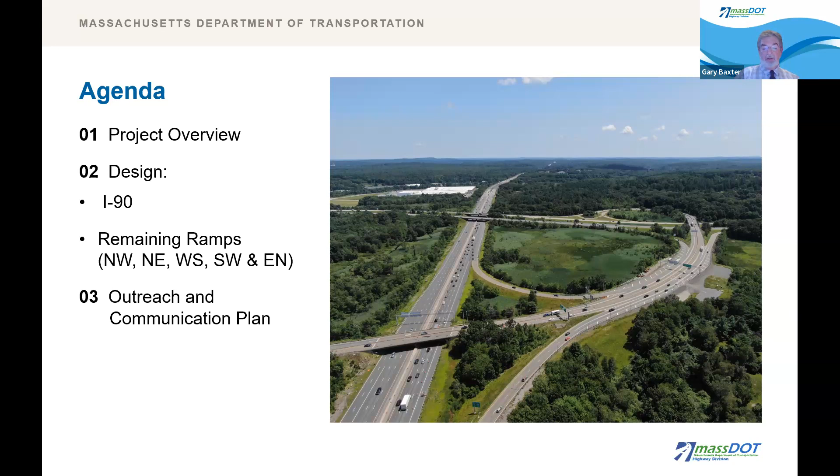All right, tonight's panel includes myself, Gary Baxter from MassDOT, I'm the PM, project manager. We have JP Telemark, assistant construction engineer for District 3. Tom Emmerich, District 3 deputy highway director. Joe Frawley, District 3 operations engineer. Alex Murray from HNTB, our preliminary design team. And our producers, Michael McNutt and Joe Yu.

From the design build team, we have Mark Shamp, project manager for our Barletta Heavy Division. Howard Goldberg from Barletta. Don Cooke, the design manager for VHB. Josh Conradi from VHB, their highway lead. And Keith Sonia from RVA, presenting on outreach.

Before we get into the details further in the presentation, I want to make some high-level points about the project. This is one of the largest projects MassDOT has advertised for construction since its inception in 2009. It's the only interstate to interstate interchange reconstruction ever taken on by MassDOT. On an average day, well over 200,000 vehicles pass by or through this interchange, and 50% of the state's commercial truck traffic passes through the interchange on an average day.

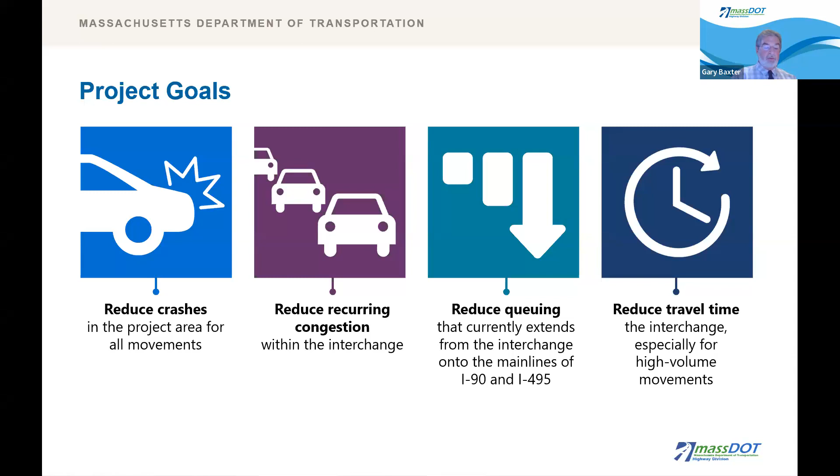The interchange is plagued by chronic congestion, which leads to extensive backups on 495 and 90. Long queuing and congestion lead to long travel times throughout the area and crashes. We have substandard geometry and traffic weaves that lead to crashes and rollovers. Remember that this interchange was originally designed for people to stop in order to pay their tolls. All these issues will be addressed by this project.

And with this, I'm going to turn it over to Don Cooke from VHB.

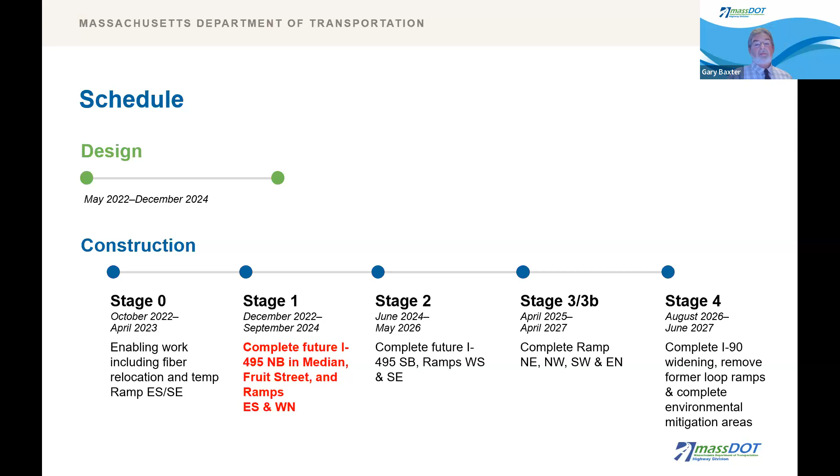Thank you, Gary, and thanks everybody for attending tonight. Part of the problem we have with the virtual format is we probably have many people we've seen at the last 3 or 4 meetings. We might find that out during Q&A, but we appreciate people taking time out of their busy days to attend.

Just as a little background, Gary had mentioned this is a design build project, and there are really 2 primary procurement methods used by MassDOT. One is design bid build, and this is a design build. As a design build project, that involves a preliminary design being developed and permitted by others, as opposed to design bid build, where the design is finalized before going out for advertisement.

As that preliminary design was developed and permitted, our team was selected to advance the preliminary design to final design and then to construct a new interchange. This project will therefore have concurrent design and construction happening over the 5-year total project duration, which runs through 2027. Most of the design is finished by the end of next year, with construction to follow. But as you can tell, we're still talking about design and design development, and some construction has commenced.

So we are continuing to advance the preliminary design to final design, and as you're probably aware, construction has commenced. We have completed stage 0, which included some early enabling work, such as the fiber optic cable relocation from the I-90 median. We are currently in stage 1, that includes work in the 495 median, on the Fruit Street Bridge, and early work on ramps ES and WN.

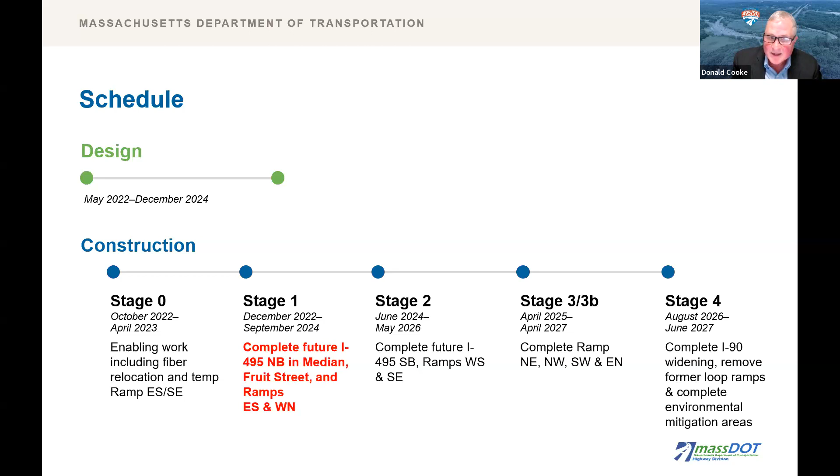So I'll be starting off tonight with a general overview of the project, followed by tonight's focus areas of I-90 and 5 of the new interchange ramps, as Gary had noted. There are a total of 8 new interchange ramps, east, north, south, west, 2 for each direction.

3 new ramps, ES, SE, and WN, were covered at previous public information meetings. For those who have joined us for the previous meetings, we have already covered a lot. We had a general project overview meeting at the end of 2022.

We presented Fruit Street along with ES and SE ramps and their design details in January of this year. We presented I-90 and ramp WN in April of this year. All of the previous meeting materials can be found on the project website.

In general, the project limits extend about 3/4 of a mile in each direction along I-90 and I-495. This project includes a complete replacement of the interchange. It's important to note that the new interchange is to be constructed in an extremely sensitive environmental resource area, which continues to inform our ongoing design development as well as construction activities.

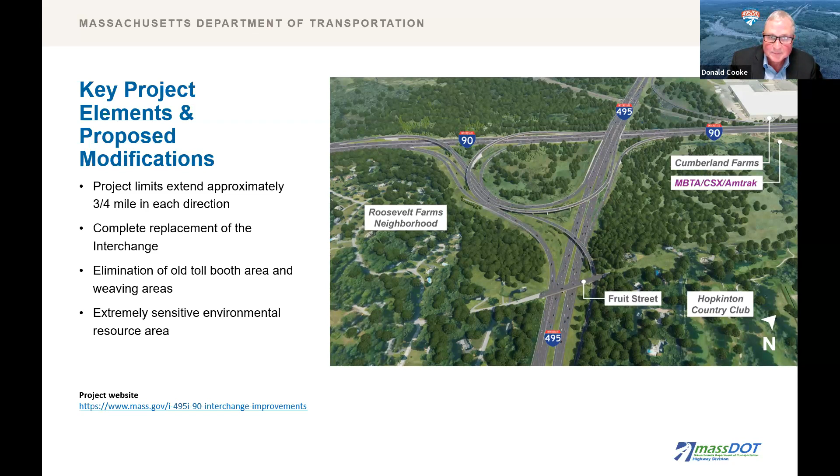I'm not going to spend a lot of time on I-90 right now, because Josh will go over the I-90 design details later in this presentation. But in overview, the future I-90 will provide 3 lanes per direction as it does today. There will be minor horizontal and vertical changes to accommodate the new interchange ramps and bring lane widths and shoulder widths up to current design standards.

The I-90 bridge over the MBTA commuter rail, as well as over Whitehall Brook, will both be replaced. I mentioned the fiber optic cable relocation from the I-90 median, but there will also be additional fiber relocations along the I-90 eastbound shoulder as part of subsequent construction on I-90.

With regards to the I-495 main line, future I-495 will also provide 3 lanes per direction as it does today. However, a major change is that the future 495 northbound will be constructed and placed in the existing median. I-495 southbound will essentially stay where it is. This approach also allows us to stage traffic during construction.

Once the new roadway is constructed in the median, we will temporarily move I-495 southbound traffic to the median, while the future 495 southbound corridor is being rebuilt in its existing footprint. Once that is complete, we will move 495 southbound to its final location and move 495 northbound traffic permanently into the median on the new roadway.

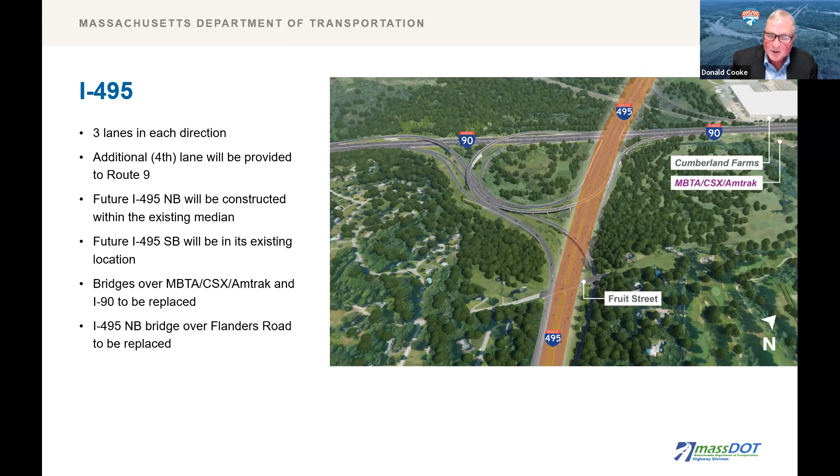So I'd like to walk through the new ramp configurations, and just for context, what ES, EN, WN represent — I'll use ES as the example — it's the ramp that connects I-90 eastbound to 495 southbound, so ES. So ramp SE will connect 495 southbound to I-90 eastbound. I know it's a little bit of an alphabet soup, and we'll try not to be too confusing tonight, but it does get involved with a lot of different designations.

With regards to ramp ES, we did present the details for that design in January, and that ramp is under construction currently. The new ramp ES will be a direct ramp provided between I-90 eastbound and 495 southbound. It is the closest ramp to the neighborhoods in the southwest quadrant.

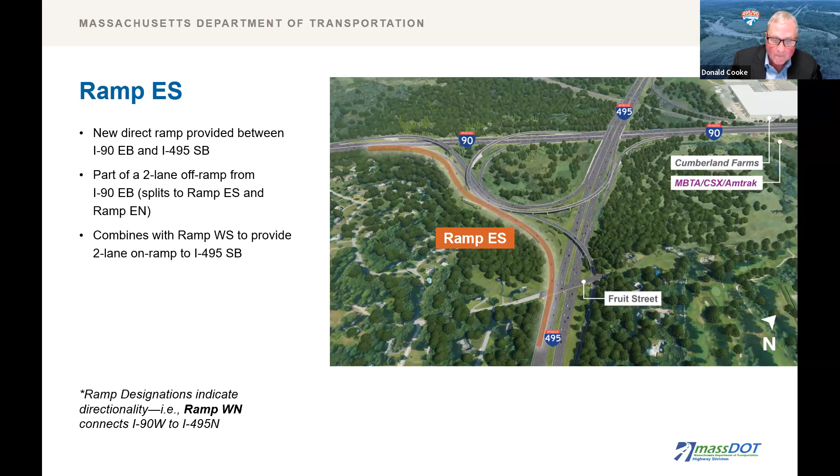Ramp SE design details were also presented in January. Ramp SE is a new loop ramp from 495 southbound to 90 eastbound. It will be part of a 2-lane off-ramp that will then split to provide connections to 90 eastbound and westbound. It will enter I-90 eastbound as a single-lane on-ramp.

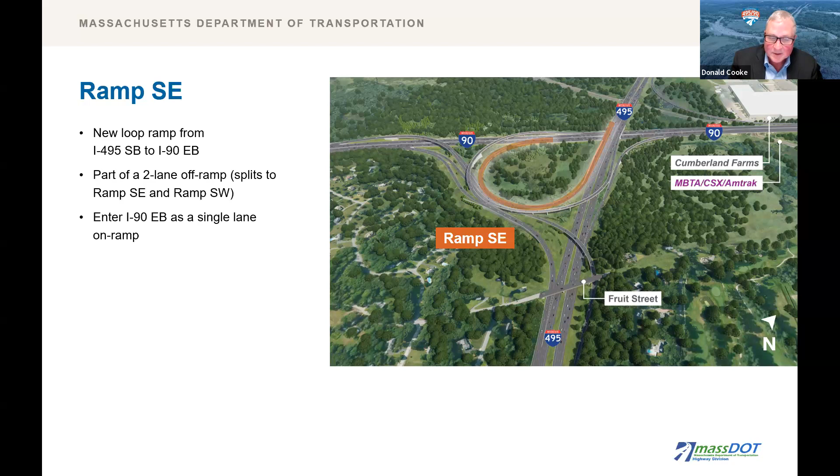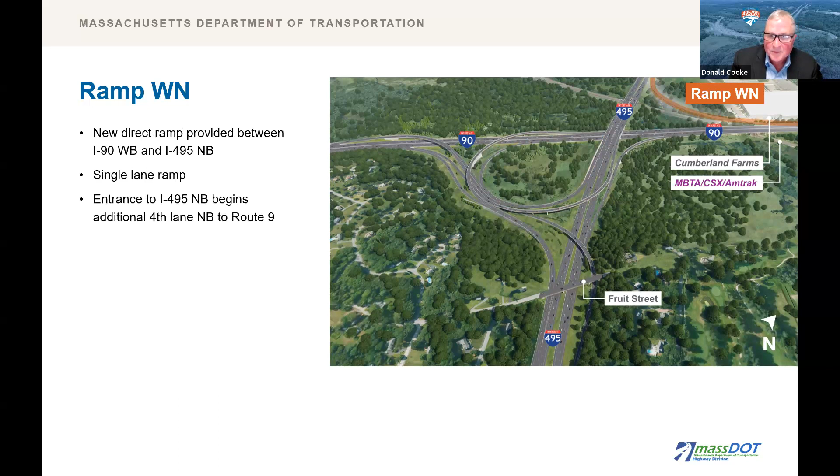Ramp WN is a new direct ramp provided between I-90 westbound and 495 northbound in front of the Cumberland Farms facility. The ramp WN design details were presented in April, but it is a single-lane ramp, and its entrance to 495 northbound begins the additional 4th lane that extends up to the Route 9 495 interchange.

So the details of the remaining 5 future ramps will be discussed in detail by Josh tonight. But just as a quick overview, Ramp WS is a new single-lane semi-direct ramp provided between 90 westbound and 495 southbound. It will combine with the new Ramp ES to provide a 2-lane on-ramp to 495 southbound.

Ramp EN is a new semi-direct ramp provided between 90 eastbound and 495 northbound. It is also part of a 2-lane off-ramp from 90 eastbound that splits to 495 northbound and southbound. EN will enter 495 as a single-lane on-ramp on the new 495 bridge over I-90.

NW is a new semi-direct single-lane ramp provided between 495 northbound and I-90 westbound. Ramp NW will combine with the new ramp SW to provide a 2-lane on-ramp to I-90 westbound. Ramp NE is a single-lane direct ramp from 495 northbound to 90 eastbound, and it enters I-90 eastbound as a single-lane on-ramp.

And last but not least, Ramp SW is a new semi-direct ramp from 495 southbound to I-90 westbound. It is part of a 2-lane off-ramp that then will split and provide connections to 90 eastbound and westbound. And it combines with Ramp NW to provide a 2-lane on-ramp to I-90 westbound.

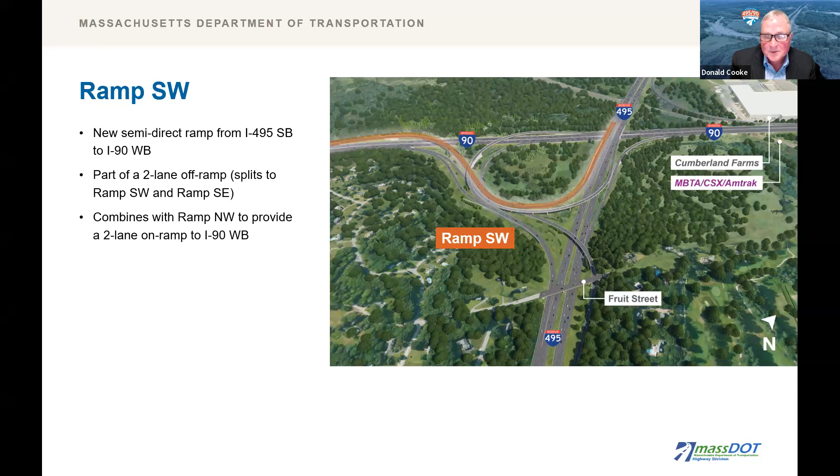In addition to the interchange reconstruction itself, there are two other key elements to the project. We've mentioned Fruit Street before, and discussed it at our January meeting. The Fruit Street Bridge will be replaced in two major stages, maintaining one lane of alternating traffic under signal control. The first major stage is currently under construction, including roadway, approaches, utilities, and landscaping features.

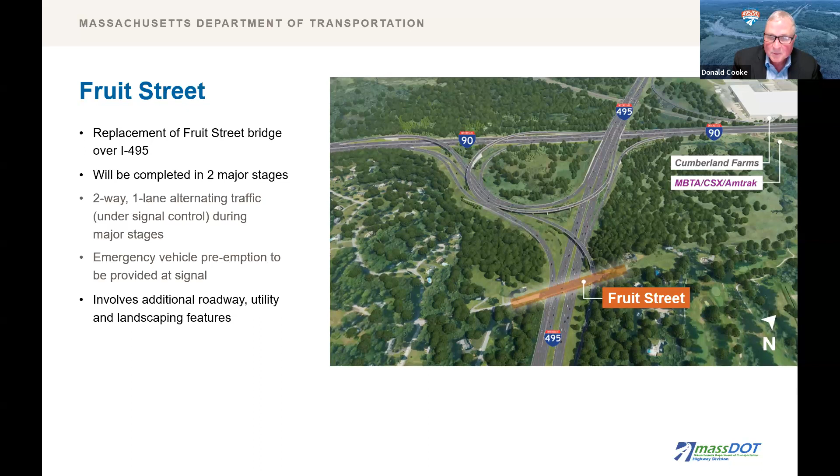Flanders Road, as mentioned, will be replaced. The northbound 495 bridge over Flanders Road will be a superstructure replacement only, constructed with an overbuild so we can maintain 3 lanes of travel during peak hours. There's also utility work below on Flanders Road, as well as minor widening to provide slightly wider shoulders and improve bicycle accommodation.

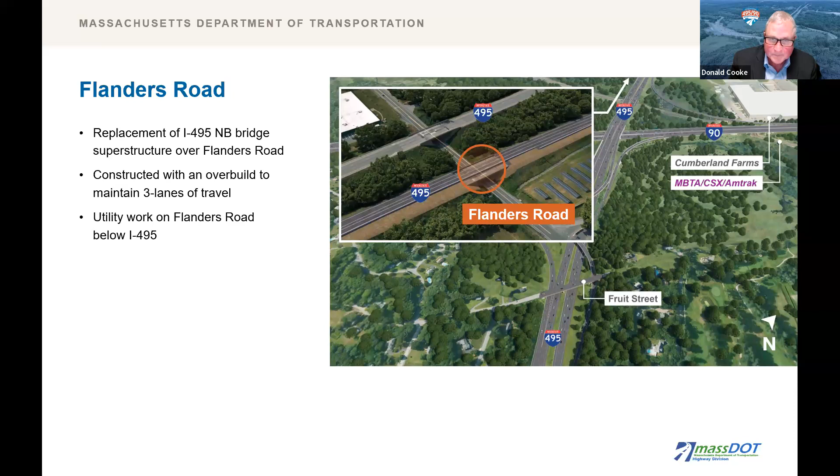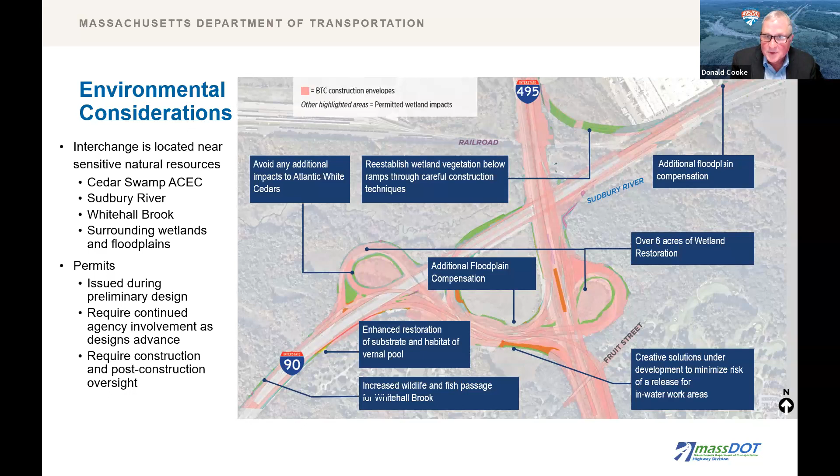I'd like to take a few minutes to talk about items typically of most concern to abutters and the people who use the interchange. This interchange is being reconstructed in an extremely sensitive environmental resource area. Permits were issued during preliminary design but continue to inform all aspects of our final design development and construction activities. These existing resource areas include the Cedar Swamp area of critical environmental concern, the first in the state of Massachusetts, the Sudbury River, Whitehall Brook, as well as numerous surrounding wetlands and floodplains. We are in close coordination with MassDOT Environmental, but also with DEP and the Army Corps of Engineers. This coordination has been ongoing during design advancement and will continue during and post-construction to assure compliance with the permits and that the required mitigation is provided.

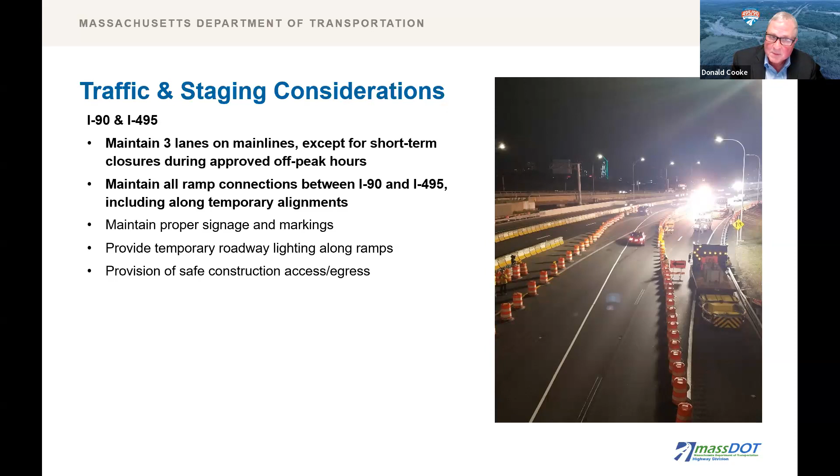Before I turn it over to Josh, one last aspect is traffic. On the main lines, for those who have driven through the project site over the last few months, the existing 3 lanes on the main lines of both I-90 and 495 are being maintained, except for very short-term closures during off-peak hours, primarily overnight. All ramp connections between 495 and I-90 will be maintained, possibly in a temporary alignment, but we are not anticipating any significant or extended ramp closures.

From a local perspective, keeping and maintaining access is important. As mentioned, Fruit Street will be maintained with one lane of alternating two-way traffic. We had a few minor full closures at the beginning of stage one, and will have perhaps a couple more minor closures, very limited in duration, as we transition from stage 1 to 2. But for the vast majority of this reconstruction, the one lane of alternating traffic will be maintained. With regards to Flanders Road, there will be short-term lane closures below to support the bridge and utility work, but Flanders Road is not proposed to be closed at any time.

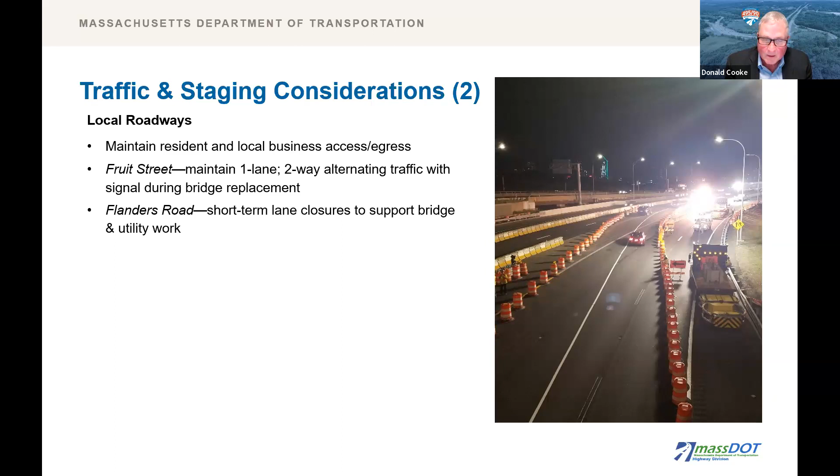With that overview, I'd like to turn it over to Josh from our team to discuss both the proposed I-90 mainline design details and the associated roadway, bridge, traffic, and landscaping details, as well as the remaining 5 ramps. Thanks, Don. As Don mentioned, I'm going to start with discussing the final design of I-90 and then transition to the 5 remaining ramps that have not been discussed at previous meetings.

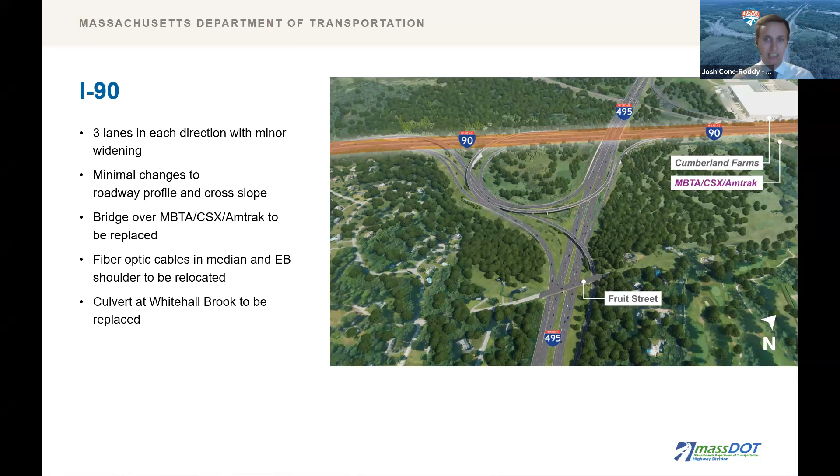This slide is a repeat of what Don discussed earlier, but as a quick reminder, I-90 will basically maintain its current cross-section throughout the project. There will be 3 lanes in each direction with minor widening to provide acceleration lanes, deceleration lanes, and shoulders that all meet current design standards. The design build team will also be replacing the I-90 bridge over the MBTA railroad tracks and upgrading an existing culvert over Whitehall Brook to a bridge.

Here's a typical section of what I-90 will look like at the end of the project. This section runs from the western extent of the project, extending east to about where the existing loop ramps are located off of I-90 today. On the left side, the westbound side, there will be 2 acceleration lanes with a varying width buffer from the mainline traffic as those ramps accelerate on and merge onto I-90 westbound. Next to them are the 3 westbound travel lanes and a paved median that will match the width of the existing median currently on I-90.

I-90 will continue to be separated by a concrete median barrier throughout the extent of the project, and there will be locations where this barrier widens out to incorporate bridge piers or traffic signs, which will reduce the high-speed shoulder temporarily. We'll see an example of that section later in the presentation.

Continuing to move across the screen, you see the 3 travel lanes for I-90 eastbound with 2 deceleration lanes for the eastbound off ramps that head towards 495 northbound and southbound respectively.

Off the roadway on both sides of the pike, there will be a mixture of retaining walls and vegetated side slopes. As Don mentioned, the area surrounding I-90 is a sensitive environmental area, so the walls along this section are mainly to help avoid additional permanent impacts to these sensitive areas.

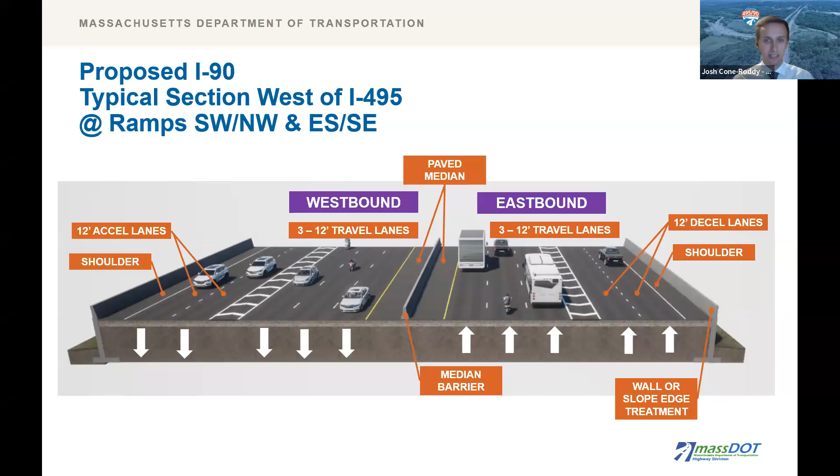I'm going to start with the western limits of proposed I-90 and work my way to the east. The total project length on I-90 is just under 2 miles, so I'm not going to go over every foot of the project limits, but I will be hitting key locations along the way.

The western limits of the project are about a half mile to the west of the existing loop ramps, and the I-90 eastbound and westbound, again, are along their existing alignments as they will be for the entirety of the project.

I'm going to turn on my laser pointer to help you see where I'm talking as I go through these. On the top of the image, you can see the westbound acceleration lane merging onto I-90 westbound.

On the bottom right side of the image here, you can see the eastbound deceleration lanes beginning to form as they head towards 495. Also in this general area is where one of our proposed stormwater basins is going to be installed to help with stormwater management.

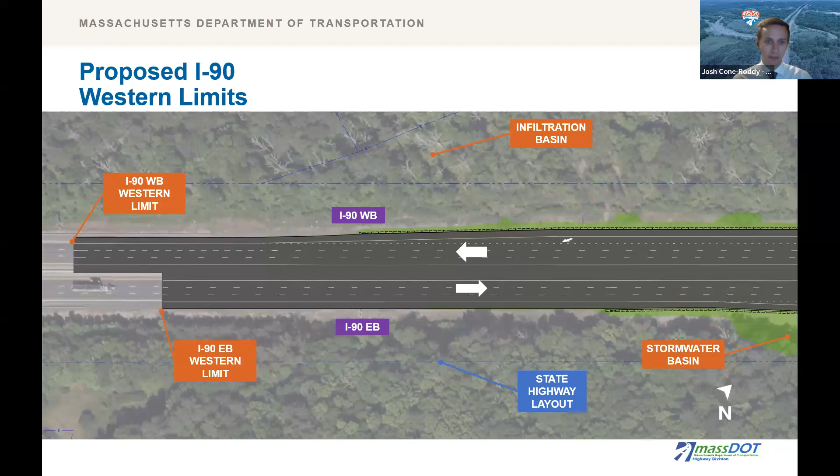Moving to the east, we get to Whitehall Brook, which is about a quarter mile from the western limits of the project. The proposed bridge is outlined in red and is going to replace the existing culvert that is out there today.

On the top right side of the image is where you can see the 2 acceleration lanes from ramp SW and NW, and one of the acceleration lanes actually begins to merge into the second acceleration lane as they continue towards the western limits of the project. On the bottom of the screen, you can see that both the deceleration lanes for ramp ES and ramp EN have fully developed.

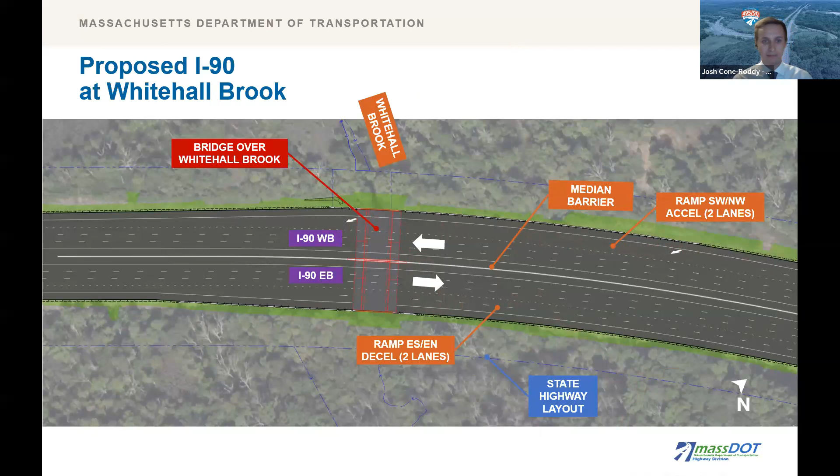Continuing on, we get to where the old loop ramps and the existing loop ramp bridge over I-90 are located. This is approximately 1,500 feet to the west from the I-495 bridges that cross over I-90.

On the right side of the screen is where ramp SW and NW will travel on a bridge over I-90, and they will continue along the top of the image until the acceleration lanes that we saw on previous screens.

You can also see where ramp ES and EN have diverged from I-90 eastbound, and you can see where they begin to split into individual ramps to head towards I-495 southbound and I-495 northbound respectively. We'll go over ramp EN in a little bit more detail later.

At the end of the job, this area at the top of the screen where you can see the existing loop ramps in the aerial image in the background will be where one of our mitigation areas will be installed to help mitigate permanent impacts to the environmental areas throughout the project.

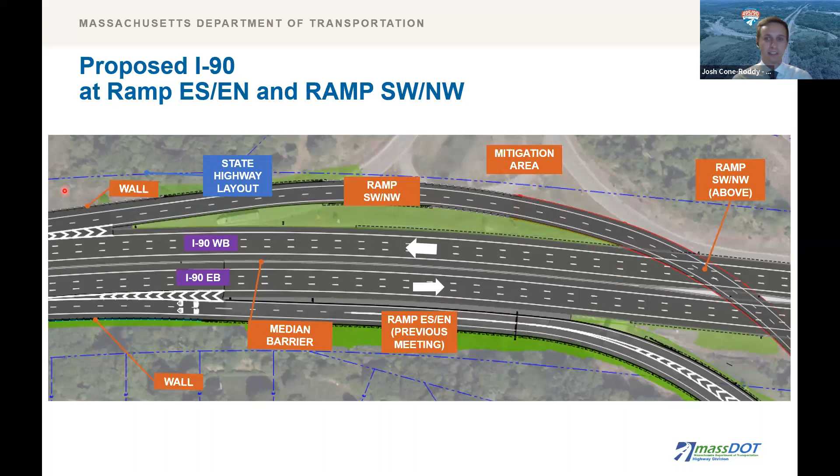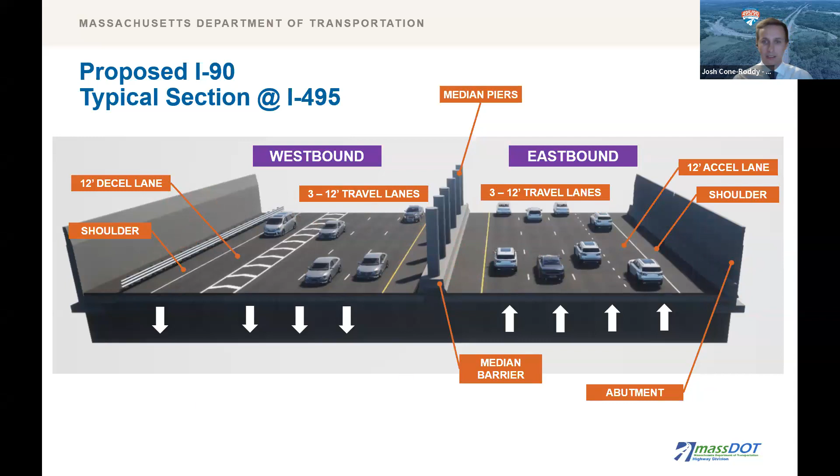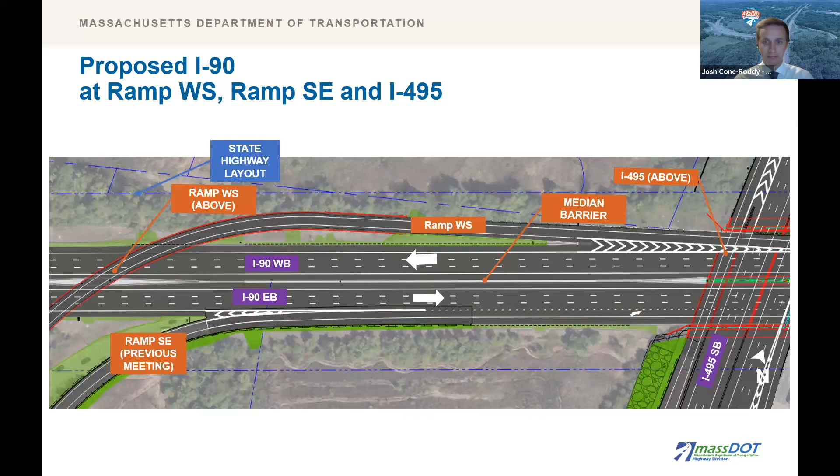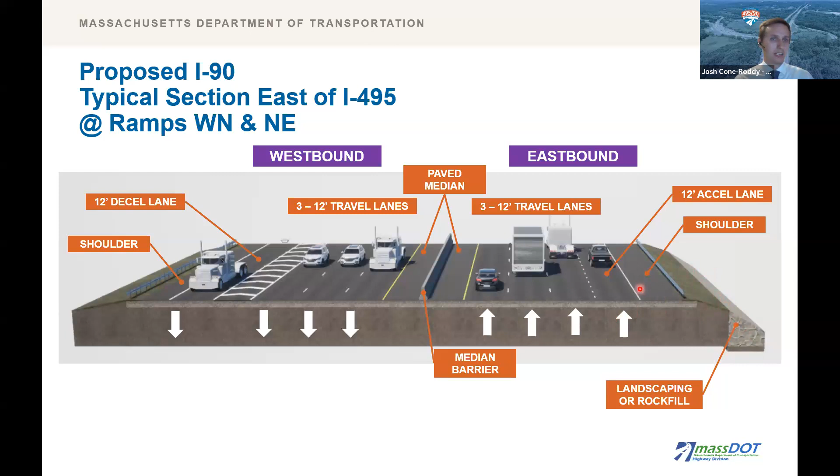The big difference on this section is that we're just showing an example of what those side slopes will look like with a mixture of landscaped side slope and modified rock fill. There will also be some plantings within these side slopes, so it's not going to just be straight grass out there.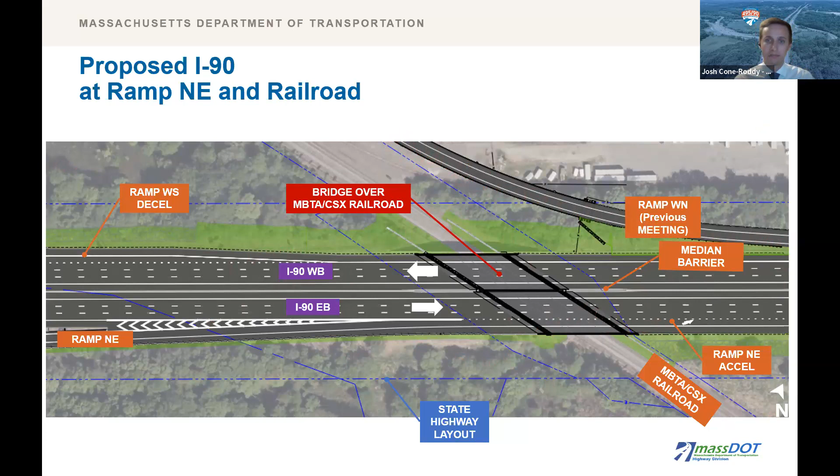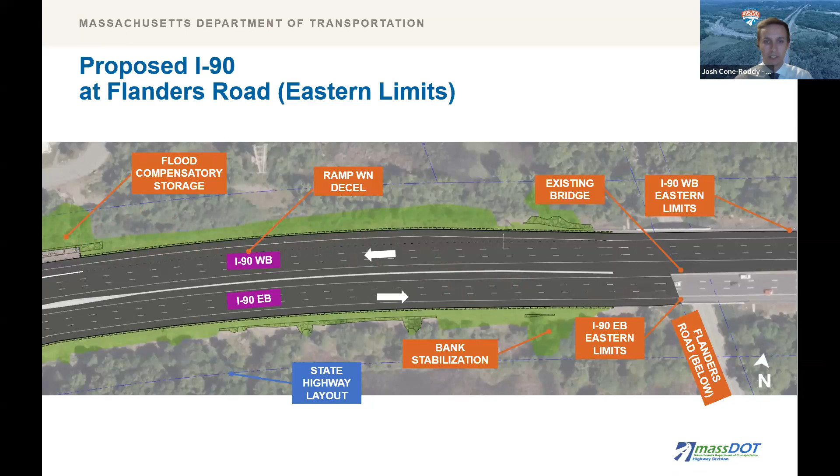Now I will jump into the remaining 5 ramps that have not been previously discussed. As Gary mentioned, those ramps are NW, NE, WS, SW, and EN. I'm going to pause briefly just to take a little sip of water.

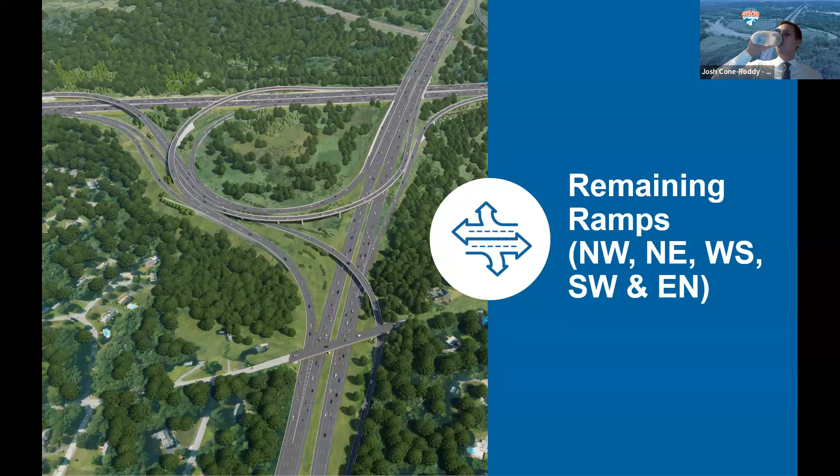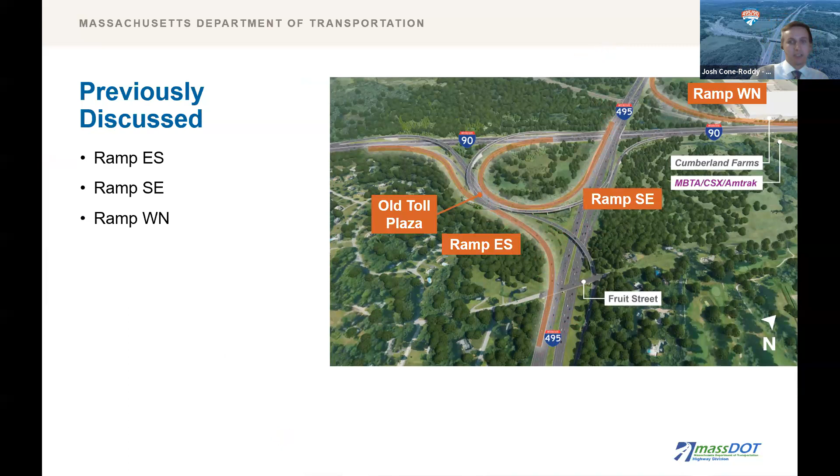Before we jump into each individual ramp, I wanted to start in the old toll plaza area. Today, all 8 movements move through this old toll plaza area with multiple weaving maneuvers and lane changes, which are necessary for vehicles to travel in their desired direction. Our proposed design will continue to see 6 of the 8 ramps travel through this general area, but weaving movements have been eliminated and decision points have been minimized to help operations and safety.

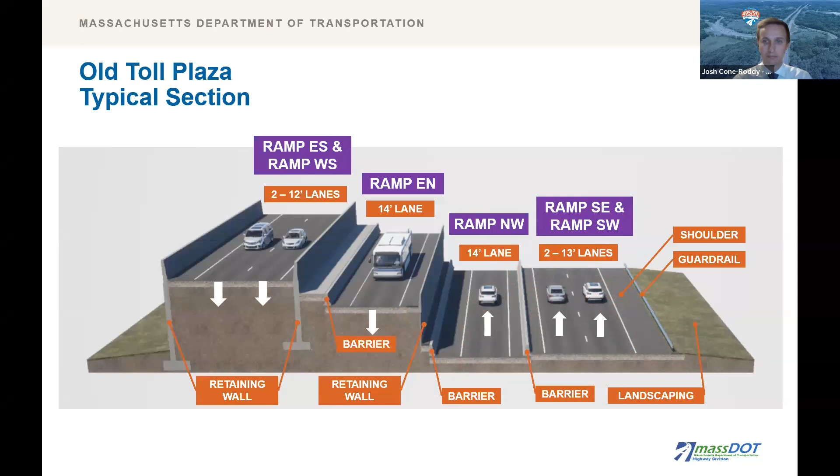Some of these ramps make more sense to walk through two at a time rather than one at a time. For example, ramp NW and SW merge together, so I'll start with those. Ramp SW comes from 495 southbound and heads towards I-90 westbound. Ramp NW comes from 495 northbound, and as we've mentioned, they combine together in a two-lane ramp just past the old toll plaza area and head towards I-90.

To make this as easy as possible, this orange border and dashed line highlight the ramp we're talking about on each slide. As I've been doing throughout the presentation, I'll use my laser pointer to highlight what I'm discussing, since there's a lot of information on some of these slides.

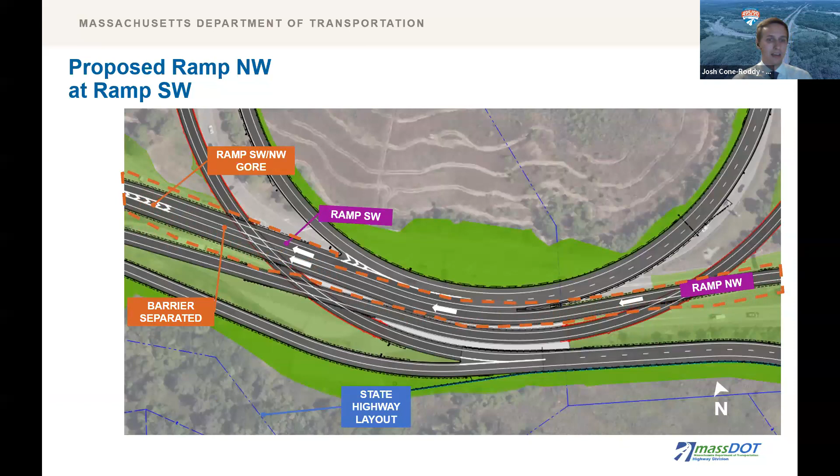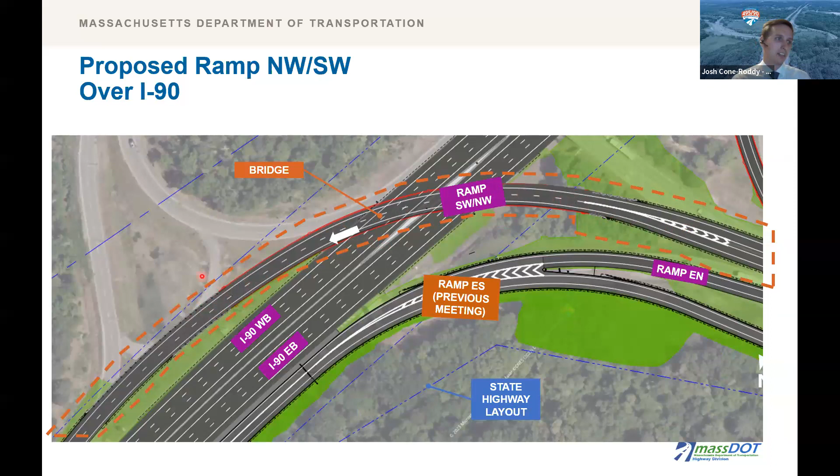Both those ramps continue under ramp WS, which is above them on a bridge structure. They continue to head toward where you can see the Gore area developing — that's where they combine to become a two-lane ramp up on a bridge, heading over I-90 westbound and eastbound, then starting to come back down in grade alongside I-90 westbound in the vicinity of the old loop ramps as they begin to accelerate and merge onto I-90 westbound.

The two-lane ramps continue — you can see where the Gore develops, and then the acceleration lanes we discussed as I went over I-90.

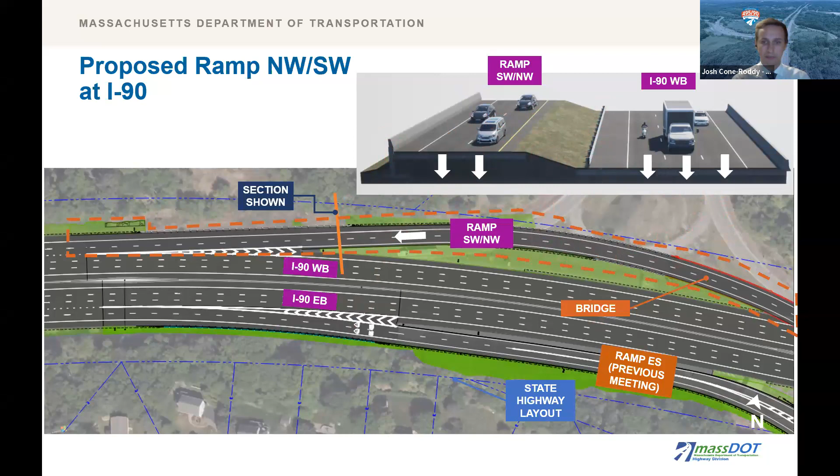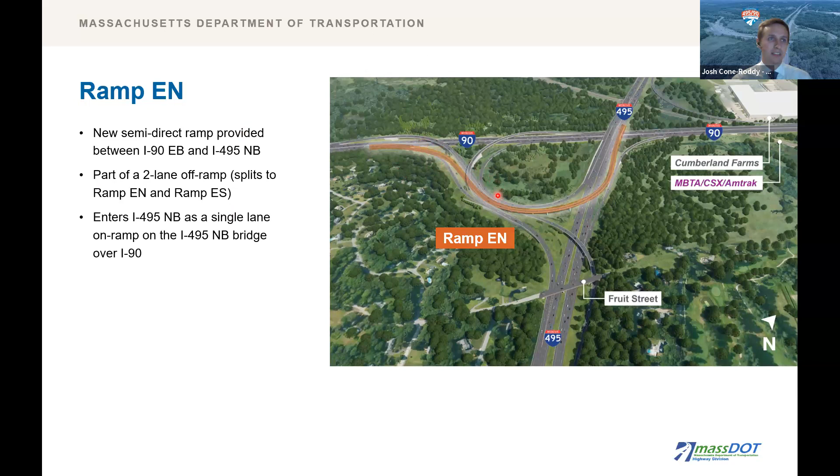The next two ramps I'll discuss are ramp EN, from where it splits with ramp ES to where it merges onto 495 northbound, and ramp NE, from where it leaves 495 northbound to where it begins accelerating to merge onto I-90 eastbound.

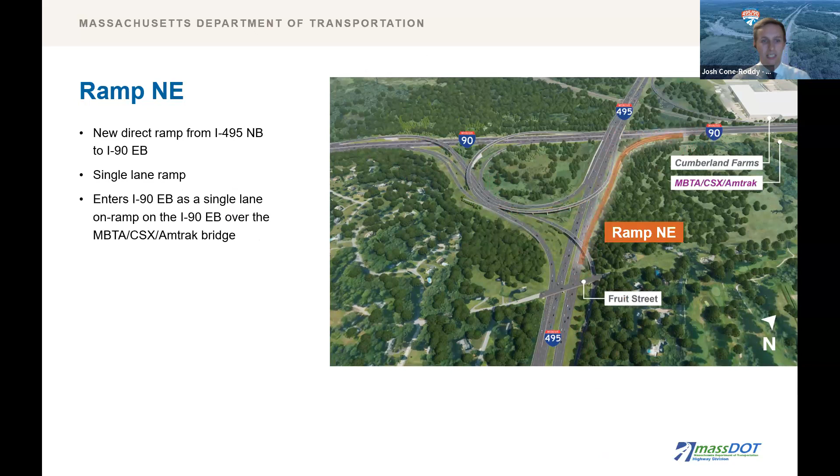Ramp EN and ramp ES, as we saw earlier in the presentation, leave I-90 eastbound together as a 2-lane off-ramp, with ramp EN traffic in the left lane and ramp ES traffic in the right lane. Ramp EN splits off to go towards the old toll plaza area, and ramp ES continues on the south side of the old toll plaza area as it heads towards 495 southbound.

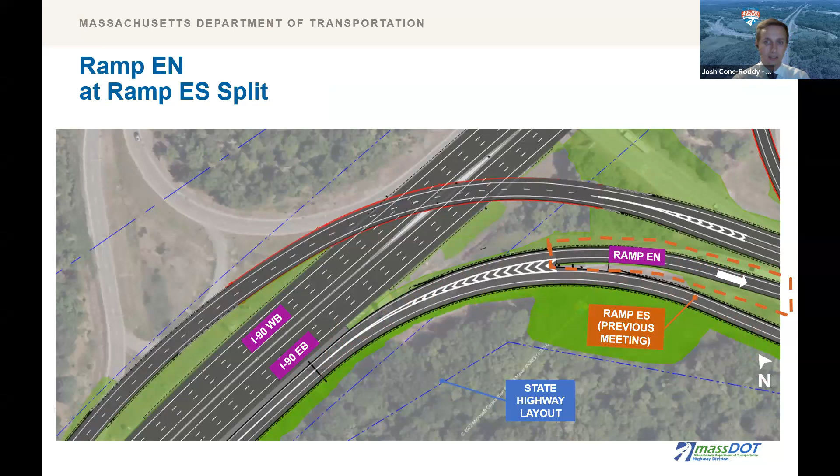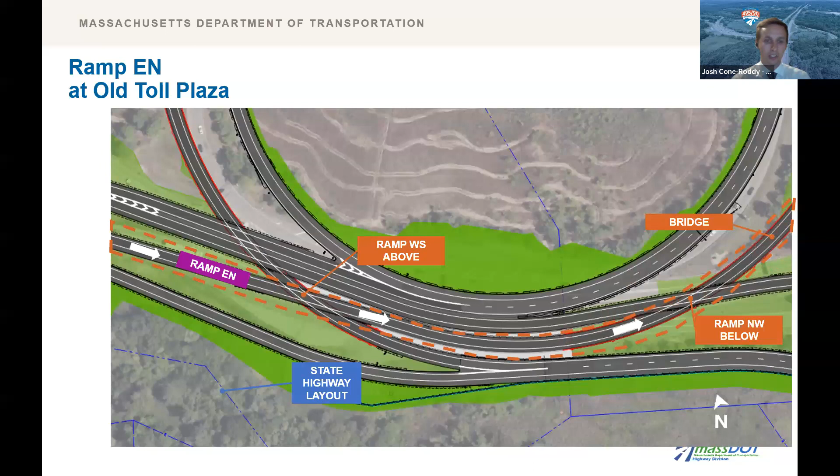As ramp EN heads into the old toll plaza, it will go under ramp WS. Once it gets under that ramp, it will start climbing in grade and elevation until it eventually ends up on a bridge structure, which begins about here. Then it will go over ramp NW through the old infield area, and then continue on to cross over 495 northbound and southbound. Just to reorient you for a minute, we changed the screen there, but this is where the last image left off and where we continue now.

Ramp EN continues over 495 southbound and 495 northbound, and then travels right alongside ramp NE, and then will continue and accelerate onto 495 northbound on the same bridge that carries 495 northbound over the pike.

On this slide, I'll also start talking about ramp NE. Ramp NE diverges from 495 northbound and starts heading almost exactly where the old off ramp is along 495 northbound, and then continues on to I-90 eastbound. Where it gets right up against ramp EN here, you can kind of see what this section will look like. Ramp EN is still going to be quite a bit higher than ramp NE here.

There will be a retaining wall on both sides of ramp EN, with some concrete barrier to protect that retaining wall from the ramp NE traffic. Then this is where ramp NE will be as it's heading towards I-90 eastbound.

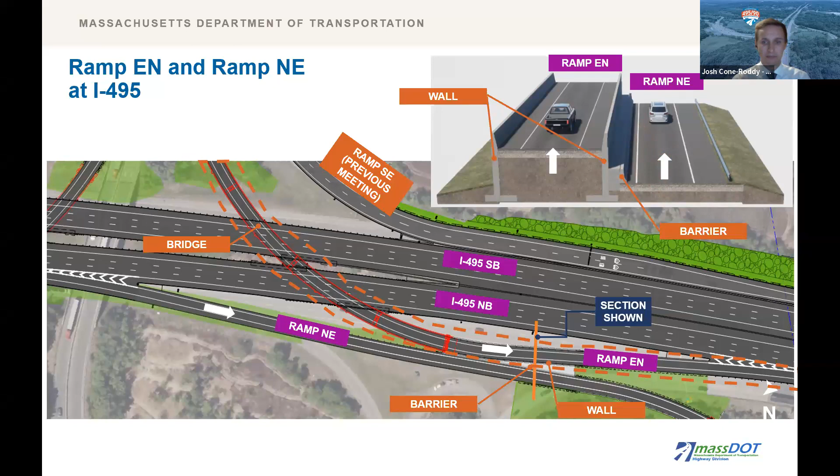As ramp NE continues to head towards I-90, it actually ends up on a bridge structure of its own as it travels over an intermittent stream and near some DCR parkland, and eventually ends up traveling over a culvert that carries the Sudbury River underneath I-90.

There are no impacts to that culvert as part of this project. We're merely just putting the bridge on top of it. Then ramp NE will come back down the grade and start accelerating onto I-90 eastbound, and that acceleration will continue over the proposed bridge over the railroad that I discussed earlier.

On the south side of the ramp here, again, there is a pretty decent sized wall that will hold up ramp NE, and that wall helps minimize environmental impacts to the land surrounding the Sudbury River on the southern side of I-90 here.

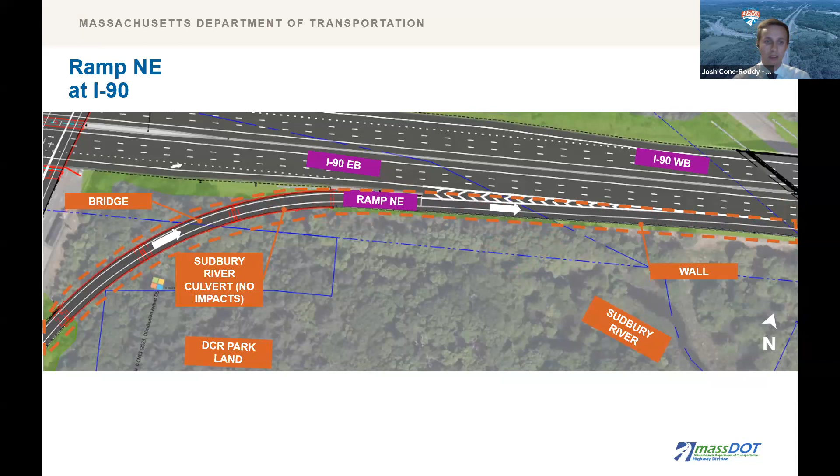So with that, if I haven't lost too many of you yet, we'll go into our fifth and final ramp of the night, ramp WS. Ramp WS moves from I-90 westbound until it combines with ramp ES into a 2-lane ramp that will continue on to 495 southbound.

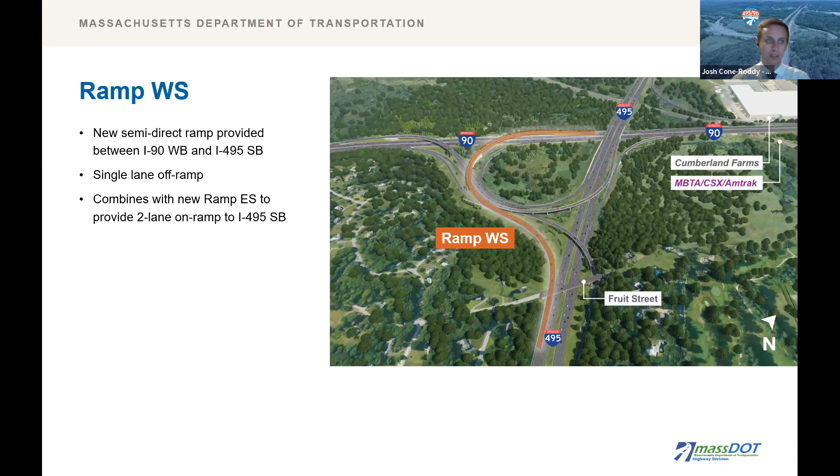We saw this same image pretty much a little bit earlier when I was discussing I-90 westbound, but ramp WS begins to diverge from I-90 westbound, basically at the 495 northbound and southbound bridges over I-90. Ramp WS will then begin to climb in elevation until it goes onto a bridge right about where my pointer is now. That bridge continues to climb until it gains enough height to go over I-90 westbound and I-90 eastbound.

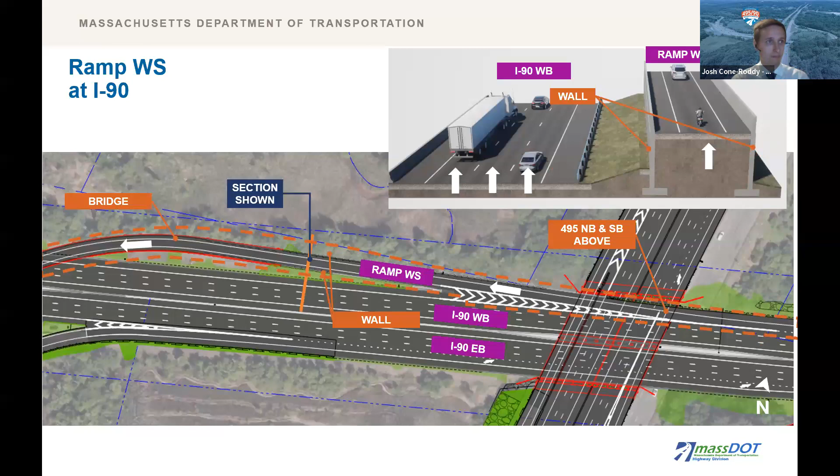Continuing on, ramp WS is on a bridge over the pike. You can see here underneath is one of the areas where that median bump out is to accommodate a pier for ramp WS. That bridge will continue through the old infield area. You can see again faintly in the background where the old loop ramp is running today, so it'll be a little bit to the inside or outside of that.

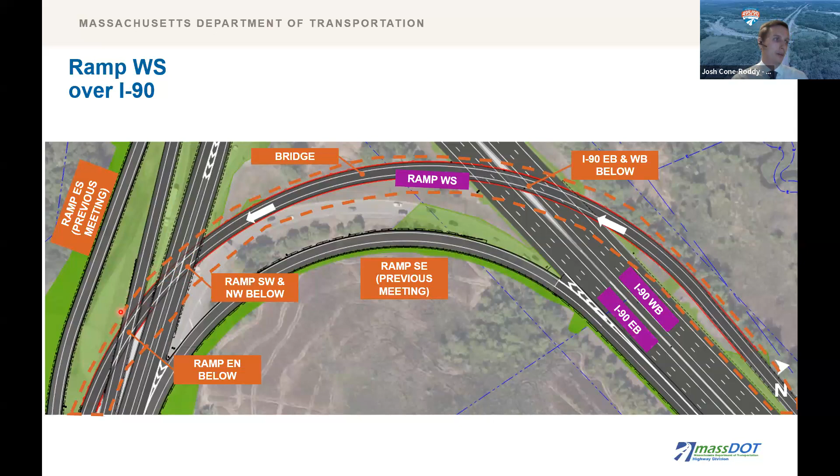Ramp WS will continue on structure over the 3 ramps that I mentioned before: over ramp SW, over ramp NW, and over ramp EN, continuing on over those 3 ramps. So again, I changed orientation on you—this is the view we were just looking at through here.

Then ramp WS continues on until it eventually combines with ramp ES, and those 2 ramps head off towards I-495 southbound.

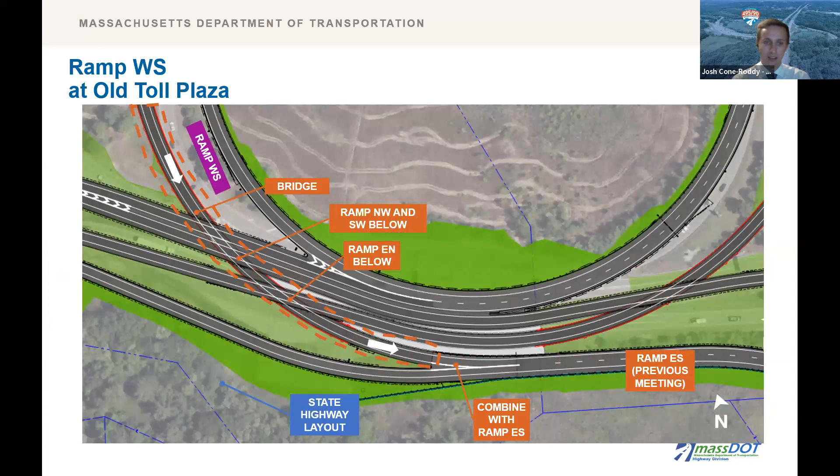So with that, I'm going to turn it over to Keith from our communication team to go over our outreach and communication plan. Thanks, Josh.

Good evening, folks. The public outreach team is assisting MassDOT by implementing a timely and informative outreach program. Ensuring that stakeholders are aware of the project and receive regular updates will help them plan their participation and choose ways to follow the project. We'd once again like to thank our municipal partners in Hopkinton, Westboro, Southboro, Northboro, Marlboro, Milford, and Upton for helping us publicize this meeting.

We've held a number of public meetings and continue to hold briefings with local and state officials, as well as neighborhood stakeholders as needed. We will hold additional meetings before the start of any major construction and at major project milestones. This schedule shows when our public meetings have occurred. I'm sure some of you have hopped on some of the previous meetings, but as new work starts, we'll continue to meet with you folks.

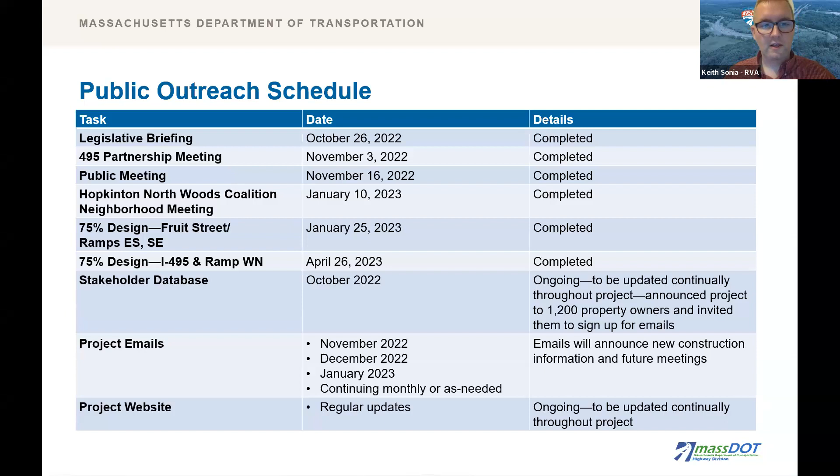We're maintaining a robust email database, which includes key contacts from regional and local organizations, municipalities, and elected officials. In October, we announced the project with a postcard to 1,200 property owners and invited them to sign up for emails. Those contacts and anyone else who chooses to sign up will receive email updates on a regular basis before key project milestones, in advance of construction activities and traffic impacts. Our stakeholder database will be continuously updated throughout the life of the project.

So if you'd like to sign up for the latest project information, we encourage you to do so. You can either scan the QR code or visit the project website. We'll also keep the project website updated with the latest construction and traffic information, so be sure to visit regularly. You can also write us with questions or comments at our email address, 495-90improvements@state.ma.us. Finally, you can find MassDOT information on social media, both on Facebook and Twitter/X.

I'd like to turn it back over to our MassDOT presenters to discuss the format of the question and answer session.

Thanks, Keith. Before we get into the questions and answer section, I'd like to take this time to ask if there are any public officials in this meeting who would like to say a few words. If you are one of those public officials and would like to say something, please type your name in the chat, in the Q&A box, and we'll give you a moment to speak. Currently, we don't have anyone.

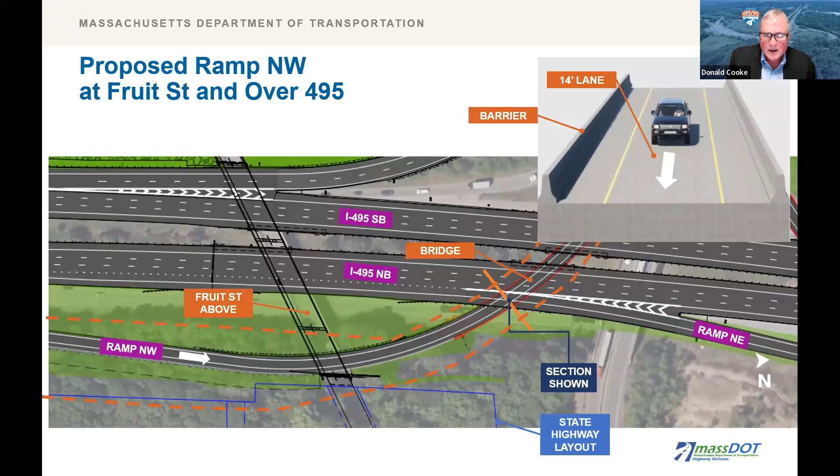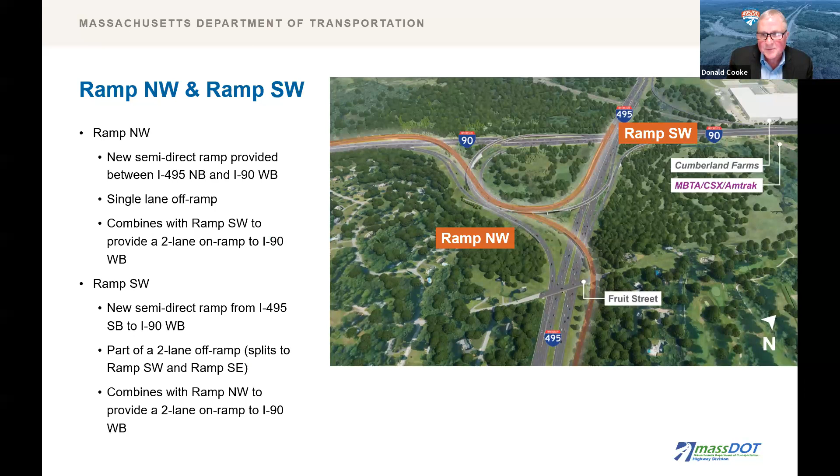How about the plan at the end, beyond the PowerPoint, where we just show all the loop ramps? I know it's fairly small scale, but maybe we can make the point from that, and we'll see. Maybe you can use your laser pointer to help me a little bit.

So you can see where the existing loop ramps are today as you come up northbound. They're extremely tight radii, extending to the east, closer to both the Hopkinton Country Club and some of the neighborhoods through that area. I'm assuming trucks are braking through that entire existing loop ramp, and then they come through and up and over, through the existing toll plaza.

Coming up off of the NW ramp, it's essentially a tangent section off of the main line, and it will be heading upgrade immediately, which will help slow vehicles down without having to brake. They do ultimately get up over 495. It will be a higher clearance level than currently, but the curve radius they'll have to navigate at the 45-mile design speed is significantly less severe than the loop ramp.

So I can't say there'll be no truck braking at all, but I do feel like the amount and intensity will be reduced with this ramp design as opposed to those current loop ramps. I just wanted to point that out from a geometric perspective, if that helps at all.

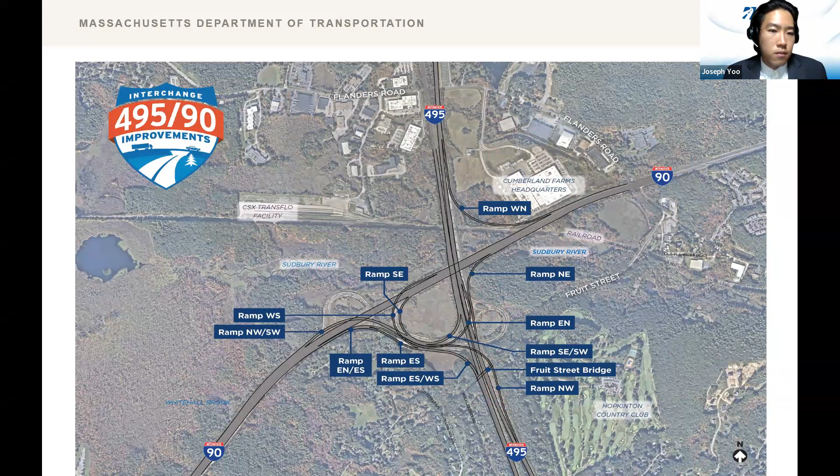Hi, yeah, so I enjoyed your presentation. The question was, I looked at the plans originally when they were initially made public, along the time where there were 3 alternative plans, and they discussed the final version is the D3. It's been over a year now. But looking at the plans, it looked like the grade going down there didn't really, and the northwest off ramp didn't really increase, and it was shown as 35 miles an hour.

So because the point at which the trucks exit the 495 going north is now moved - right now I'm not sure what it is exactly, it was right at the turnaround underneath Fruit Street - it's now been moved back, or will be moved back, about 1,100 feet. Which is actually, you can see the golf course, there's all the big green area over there, but it moves it down to a point which is right at the 495 emblem.

So my question is, what's going to happen to the trucks as they try to anticipate the need to decelerate on that junction? That was my concern. So the question is, is the impact for noise going to be distributed southward, and all those people are going to experience that?

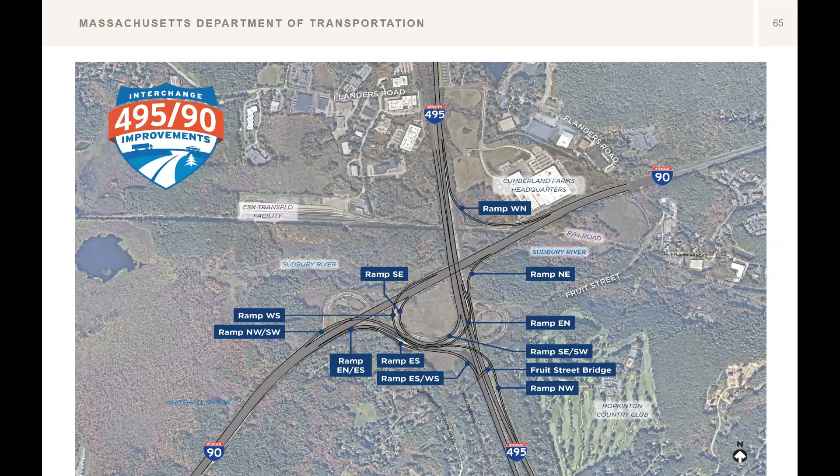I think what I can offer is that where it comes off of 495, the ramp itself is essentially a transition section. So that 45 mile reduced design speed, compared to the main line, really doesn't start to geometrically come into play until you get up under Fruit Street and into that first curve. So there may not be a need to decelerate significantly coming off the main line, but of course there will be some.

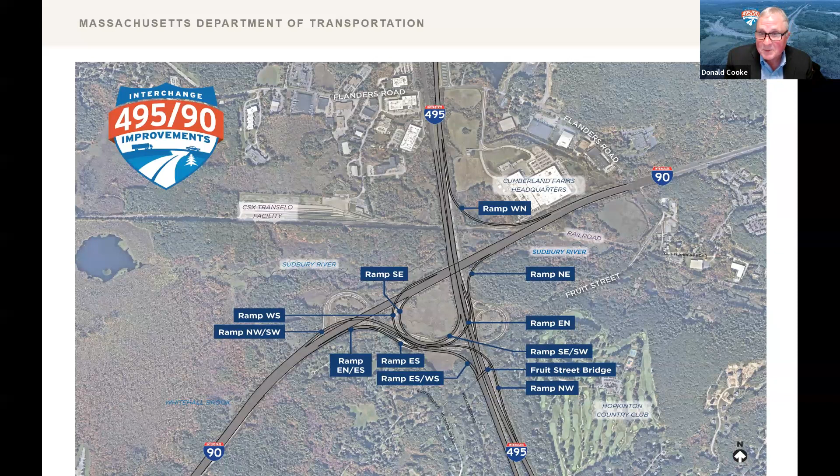I think the best thing would be to drop something in that email as we're compiling all the noise evaluations done previous to our team jumping on board. We can look at what that actual analysis looked like, and we'd be happy to provide updated profiles and plans, because if you're looking at some of the previous alternatives developed before last year, you might be looking at stuff that's been discarded or refined as part of our design development over the last year. So we want to make sure you're looking at the latest and greatest stuff. Drop something in that email and you'll be on the list of people we get the noise analysis back to, and we can also provide updated plan and profile specifically for ramp NW if that's what you're looking for, to help you understand it a little bit better.

The simple answer, as Josh has brought up, is no. Some of this might just be that it looks like you're crossing, but you're actually crossing at different levels. There will certainly be merging taking place where a one-lane ramp and a one-lane ramp come together into a two-lane ramp, so it's not forcing a merging of any traffic, and there's no weaving at all. We've eliminated all the weaving with this ramp configuration. It may look like it on some of these graphics because things look like they're happening at the same level, but they're actually all separated by bridge structure, over and under each other. So you won't have that weaving. It'll be a much better situation.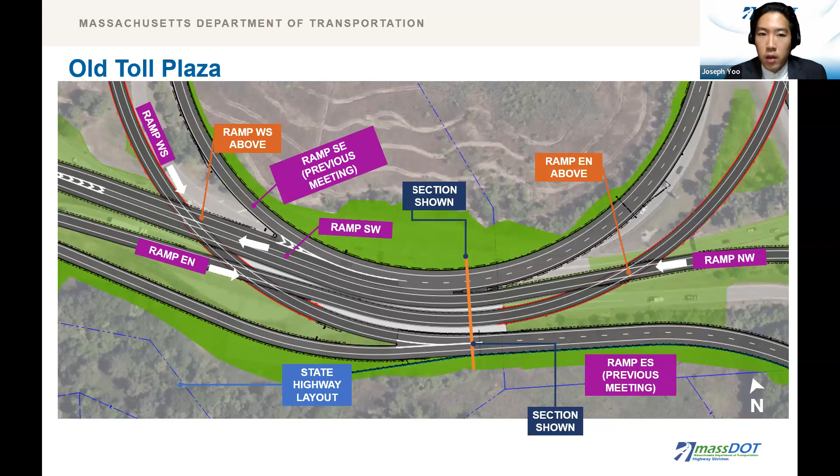Thanks, Don. We have a question from Deneen, who just joined in, asking when the Fruit Street Bridge over the railroad is going to be completed.

I think Tom and Joe are ready to answer that, they have some information as an update. Yeah, I was just trying to find the unmute and video buttons.

Currently, weather's been playing a role in the completion of the construction of the bridge. We anticipate late fall, they should be pouring the bridge deck sometime in the next week, and we hope to have it open probably before Thanksgiving. That's what it's looking like right now.